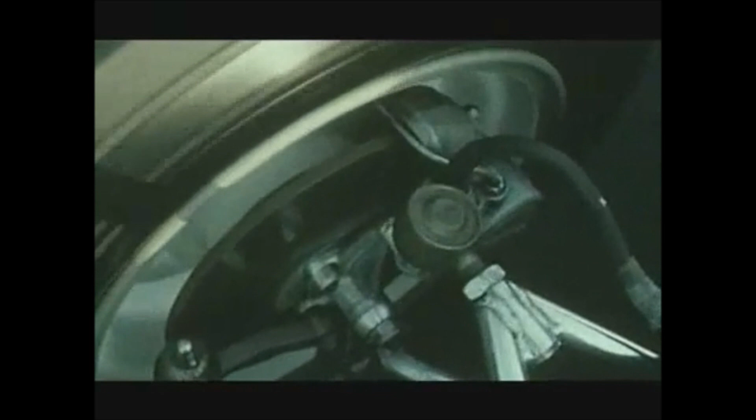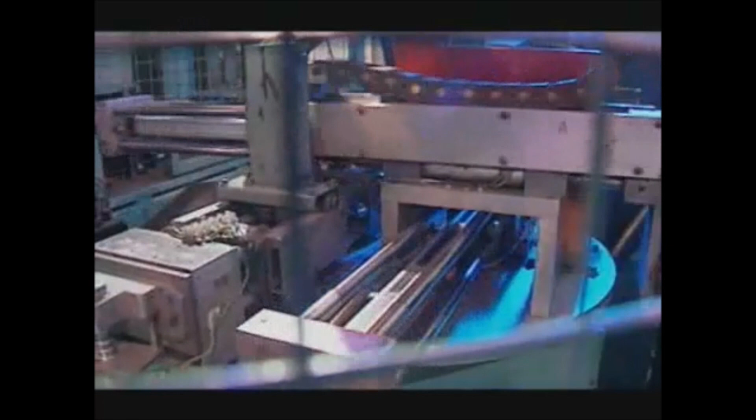As the new car industry started to flourish, he then took up the challenge of developing new materials for brake linings needed by the ever-popular motor vehicle. And it wasn't long before his brand and range of products soon came to epitomize quality and excellence in braking performance. But Herbert Frood wasn't content with making products solely for the car industry, and was soon exploring the potential of all forms of powered land travel. And over 100 years later, Ferodo manufacture brake pads and linings for cars, trucks, bikes and trains worldwide.

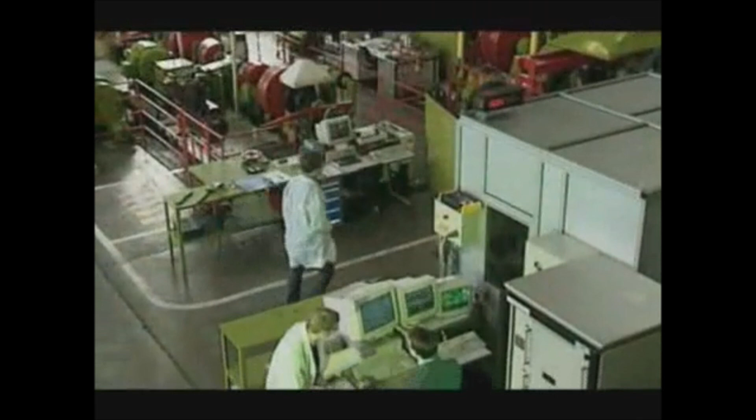In 1998, Ferodo became part of the American automotive giant, the Federal-Mogul Corporation, specializing in the design, production and supply of original equipment to car and motorcycle manufacturers and the aftermarket sector. This led to an important restructuring of Ferodo's motorcycle division and the creation of a specialized center in Mondovi, dealing with everything from concept, research and manufacture through to global distribution.

Here we are in Mondovi, Federal-Mogul's Center of Excellence for motorcycle products. Our world-leading research and development team work closely with major manufacturers to develop not only groundbreaking friction materials for original equipment, but also to carry this technology and highest quality control forward into our aftermarket program.

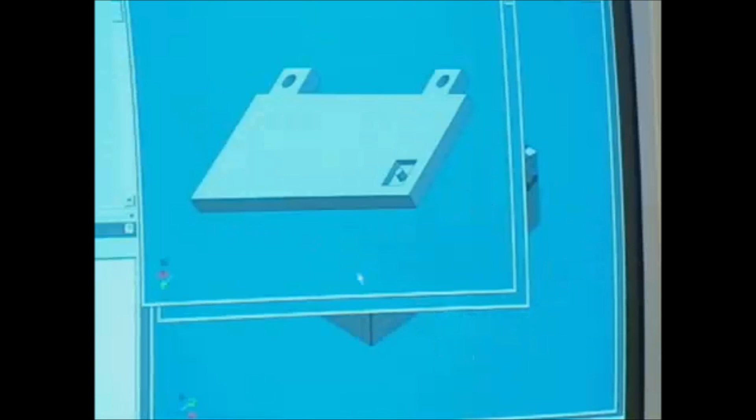The first step in the creation of any brake pad is design. Following extensive consultation with the motorcycle manufacturer and having developed a pad specification, our highly skilled design team sets to the task of creating the desired product. Their knowledge of product application, braking compounds, mix formulae and engineering techniques is invaluable to meeting the challenge, and often exceeding the manufacturer's expectations. All dimensions and characteristics are meticulously checked before the prototype pads are made and sent for intensive testing.

This is one of the largest dynamometers in Europe. It has the ability to simulate the brake system of a high-speed train fully laden with passengers. Its awesome capabilities are one example of the tools we have in this R&D centre. To tell us more, here is the director of the R&D centre, Adelphio Zanar.

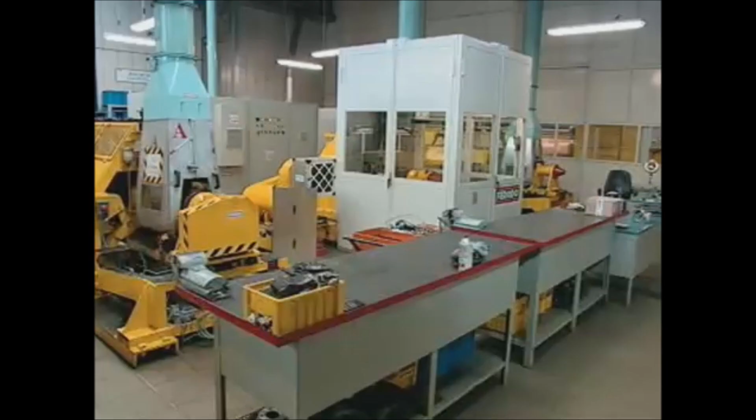In this research and test center, we take a brake pad from a concept to a proven product. We can simulate any test on any vehicle, from a train to a mountain bike. Ferodo has been at the leading edge of friction technology for more than a century. Before any new or innovative Ferodo product goes into service, it is tested and tested again to achieve the criteria set by original equipment manufacturers.

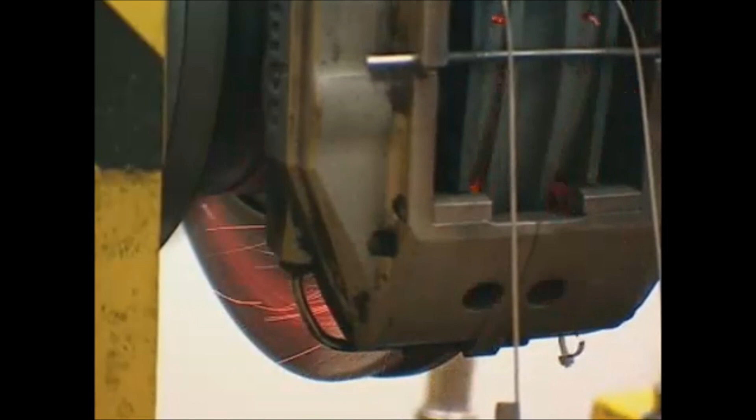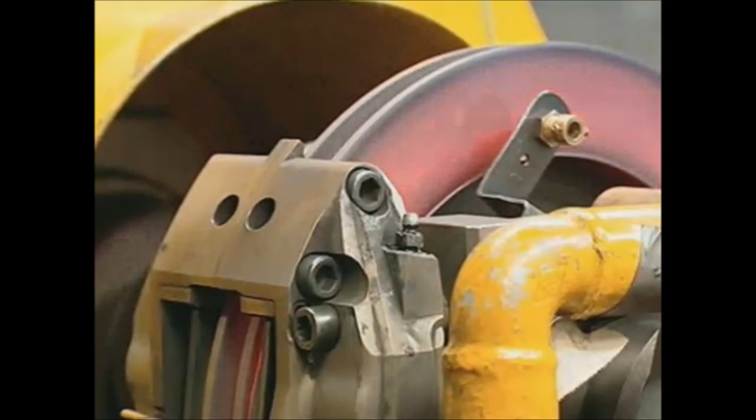Consistent reliability demands stringent testing. Even a product designed for use on a street bike will be subjected to a racetrack simulation to ensure it performs perfectly under the most extreme conditions. Computer-controlled dynamometer programs simulate test schedules. These are often provided by the motorcycle manufacturer to guarantee the material works effectively for the exact application.

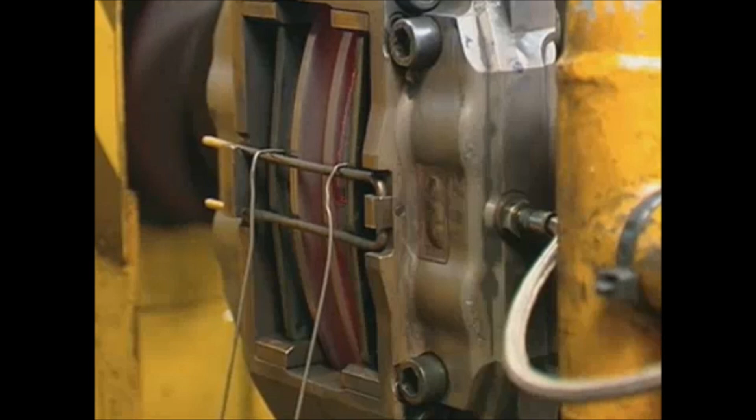Sensors monitor pad temperature, vibration, wear, and many other parameters. Any modifications can then be highlighted, addressed, and rectified before retesting. Only when test results prove that every detail of the manufacturer's specification has been met or exceeded can production begin.

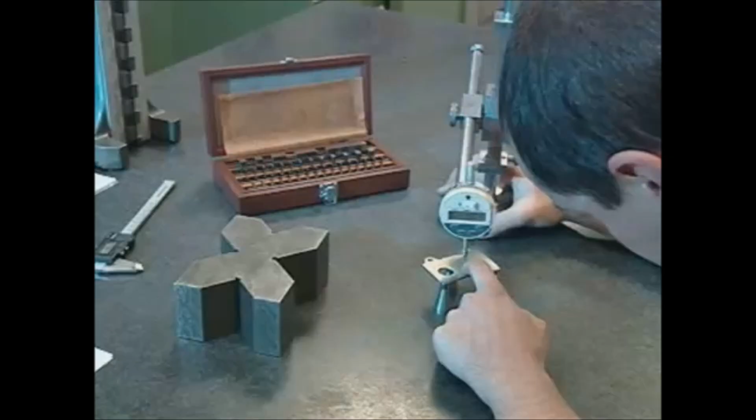This is our state-of-the-art production line, where we're going to take a look at our two types of brake pad technology manufacturing, organic and sintered. To conform with the high specification demanded by the world's major motorcycle manufacturers, quality checks are made on all incoming materials to ISO 9001 accreditation. The Kanban system is used to record and reorder materials from suppliers, ensuring that all batches are instantly traceable. This information is made available to brake system manufacturers to provide proof of our maintained high-quality production.

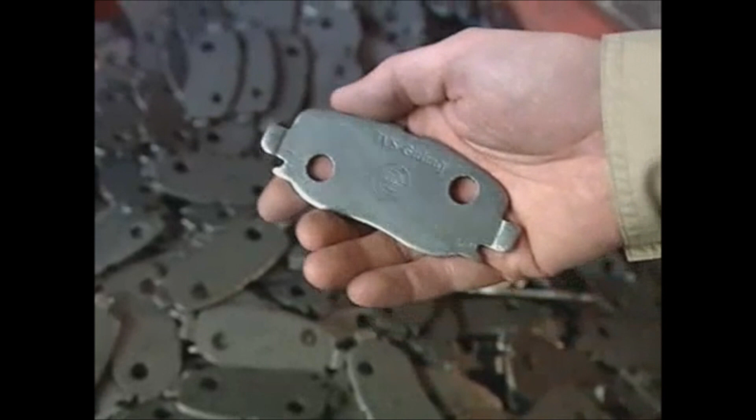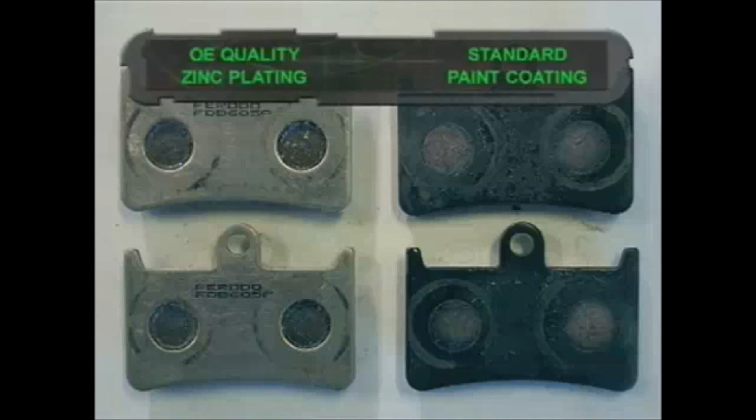Our organic production employs a process using patented zinc alloy coated plates, unlike other aftermarket products which use a painted backplate. The zinc alloy stops corrosion of the backplate in the caliper, preventing it adhering to the piston, a problem common to paint-coated plates.

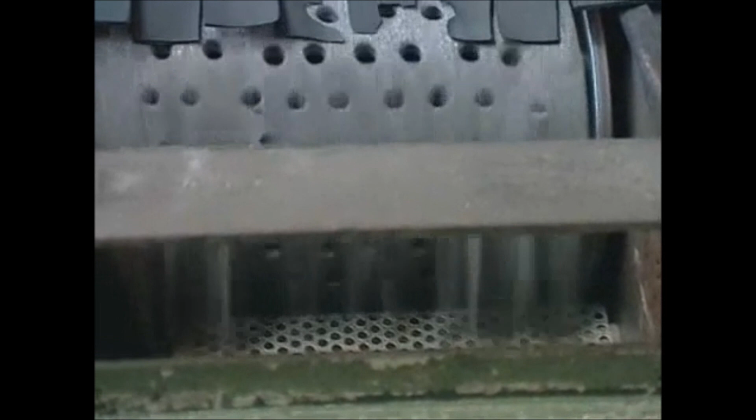The backplates are first passed through a machine where they're shot blasted on one side with cast iron grit. This removes any grease or dirt accumulated during the production process, leaving one side completely clean for the spray application of the Ferodo patented special adhesive. All plates are batch tested to check for the correct surface coarseness and quantity of adhesive coverage.

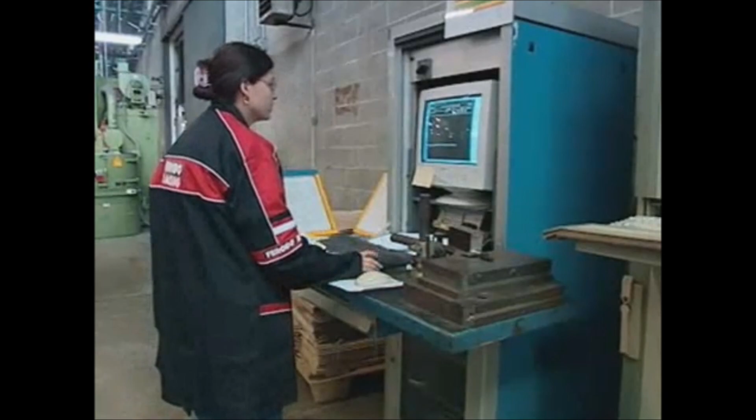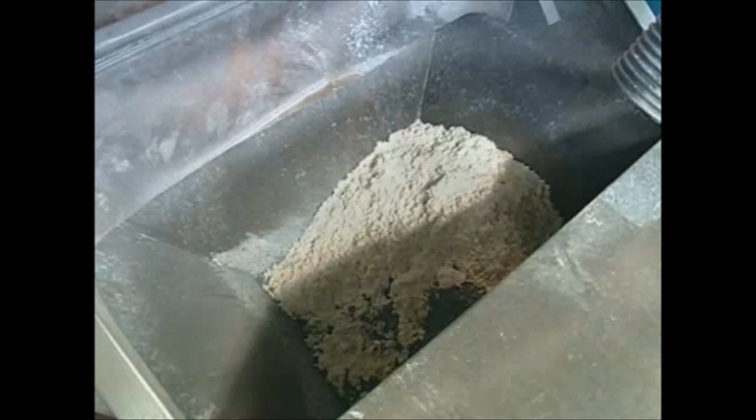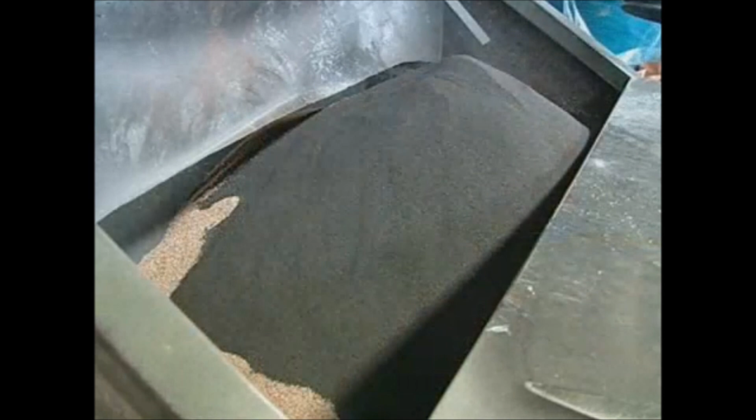At the same time, the mix formula for this product is downloaded into the latest computer-controlled batch mixing plant. The dry ingredients are added to the hopper and individually weighed to an accuracy of plus or minus 0.5% of the pre-programmed setting. Any mix formula typically consists of 50 or more ingredients for optimum performance. The recipe is then transported pneumatically from the weigher to silos before being loaded into the mixer.

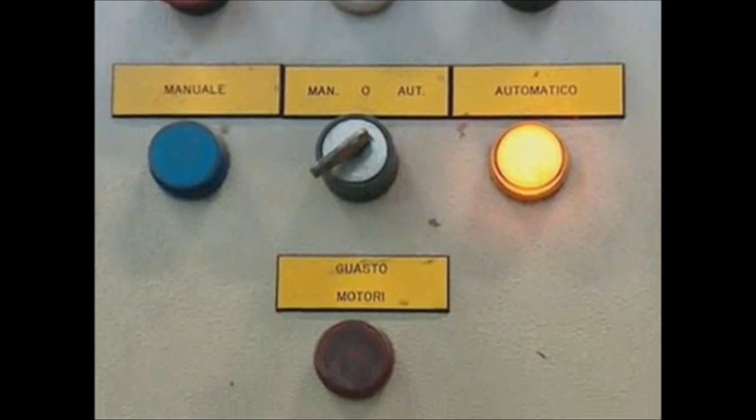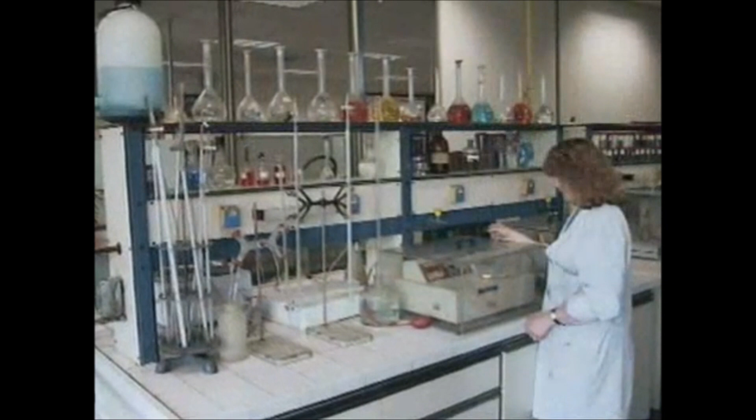It is then thoroughly mixed to guarantee consistency through the batch. All resins and rubber liquids are added automatically. Our dedicated on-site laboratories take samples from every mix, constantly checking density and volatile levels before assigning a quality control approval certificate, required before any mixture can progress into production.

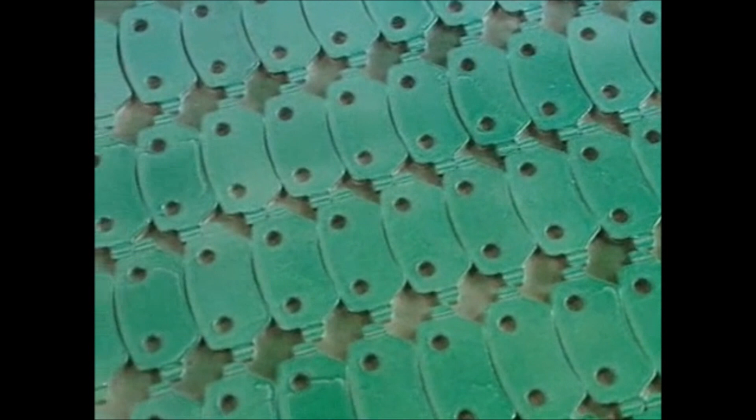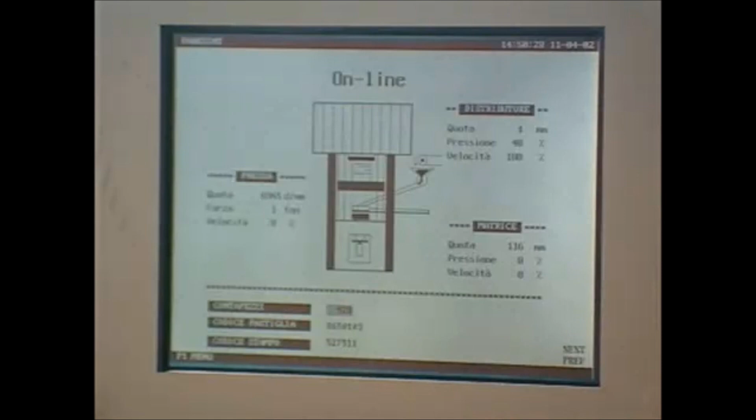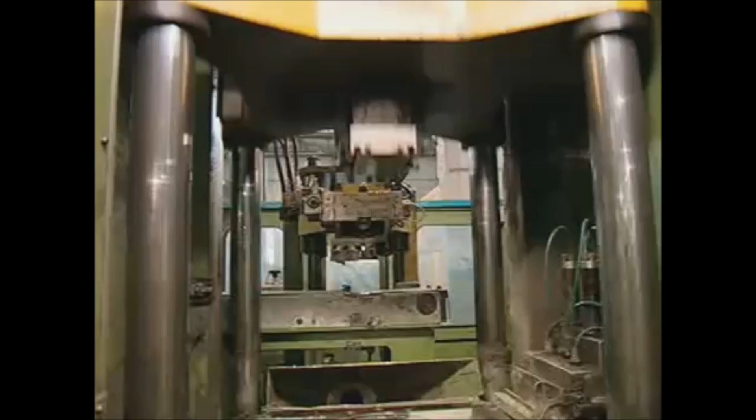The plates and friction material now come together. This is achieved using our patented vulcanization pressing system, a process validated as OE standard and is almost fully automated. After loading the spray-glued backplates onto the press feed conveyor, they proceed to the pressing head. They are held by the press head and driven downwards onto the dies. These are filled with the correct quantity of mixed formula and pressed at high pressure, making a firm bonding to the backplate.

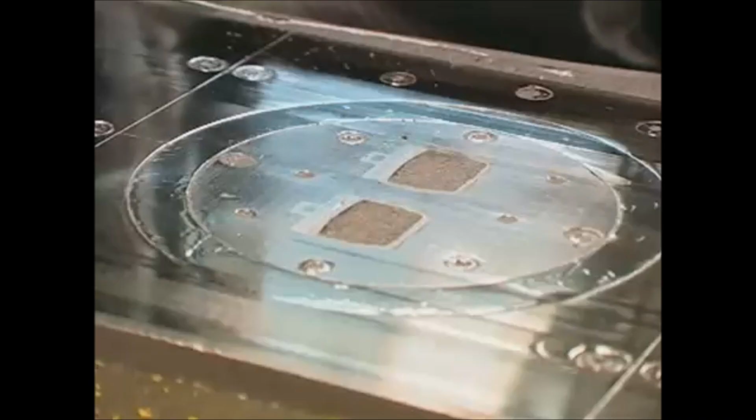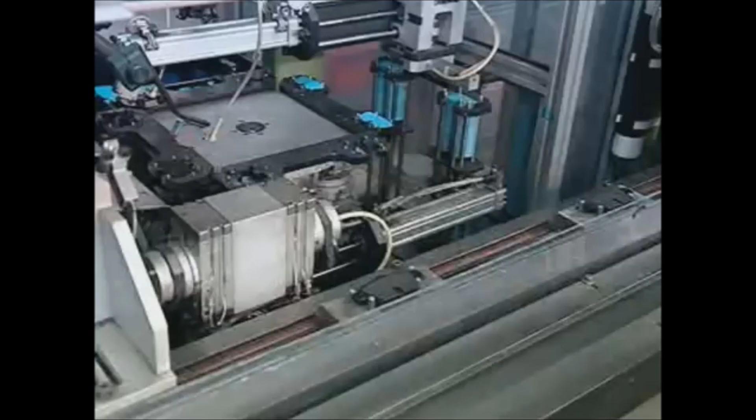The head retracts and the formed brake pads advance to the exit conveyor. The die is then cleaned in preparation for the next pressing. The pads are then cured in a high-temperature oven. Up to this point, all pads have followed the exact same process. It is only now the products are separated for marking either as original equipment or aftermarket. Both are marked with a batch number for trackability and then packed accordingly. This flexible production process allows for a very short lead time of only 31 minutes for the manufacture of any pad.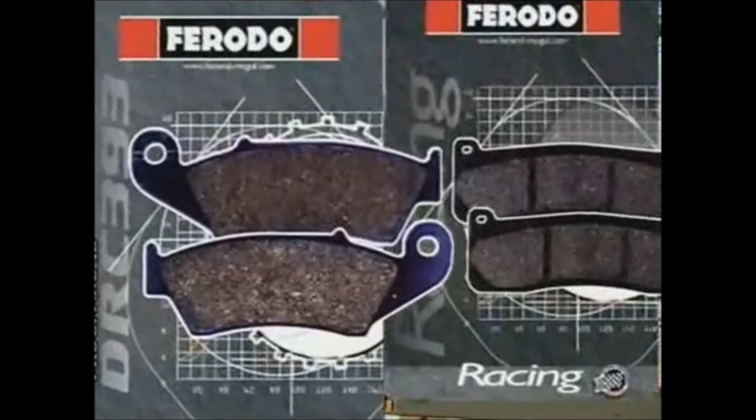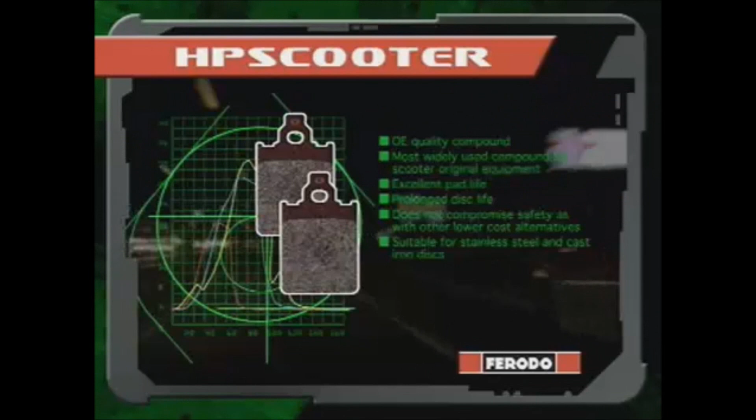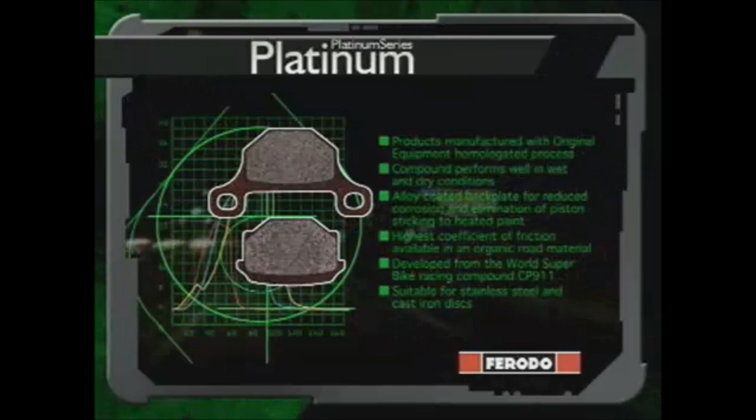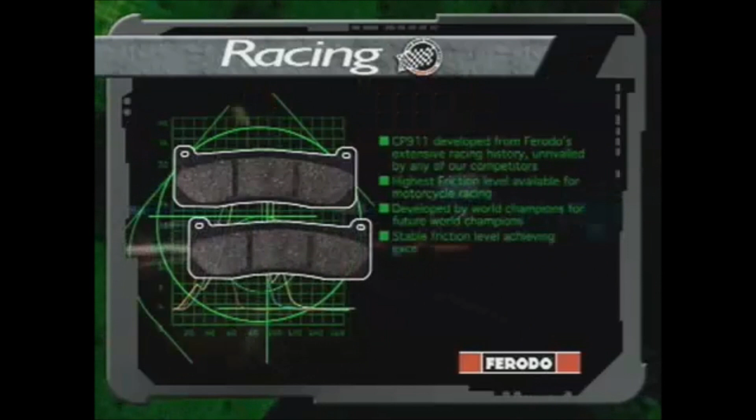Products in the organic offering range from HP Scooter, designed as OE for today's high-performance scooters where safety is the priority. Platinum, the #1 performing compound for high-performance road use, incorporating technology gained from Ferodo's World Racing Program. DRC 393. DRC, or Dirt Racing Compound, offers benefits perfectly suited for competitive off-road use by professionals, ideal for dry or desert conditions. CP 911, the world champion. From the demands of the Isle of Man TT to the circuits of World Superbike, our organic racing pad has provided the performance and modulation required by the world's best riders.

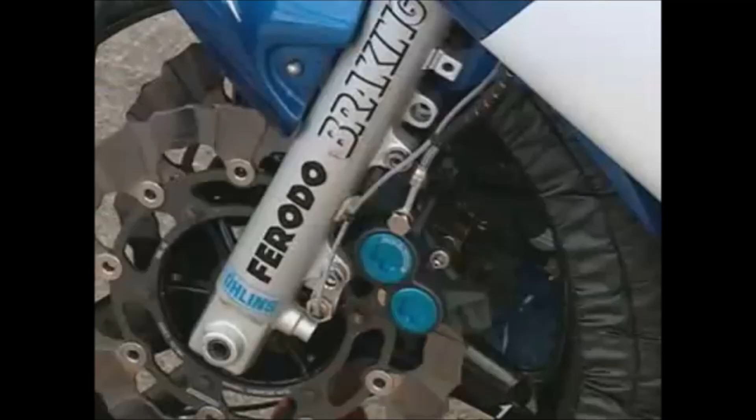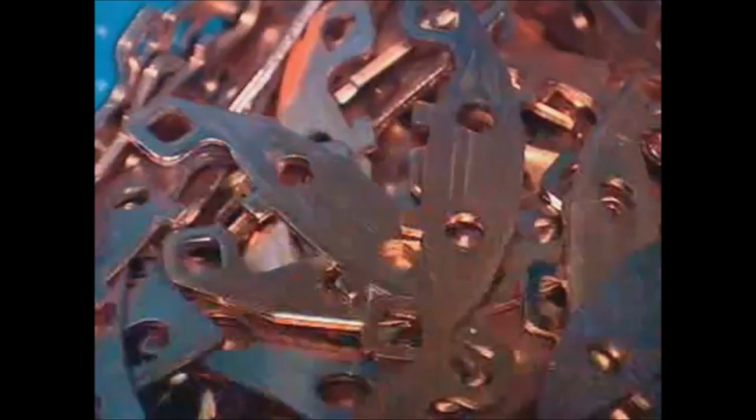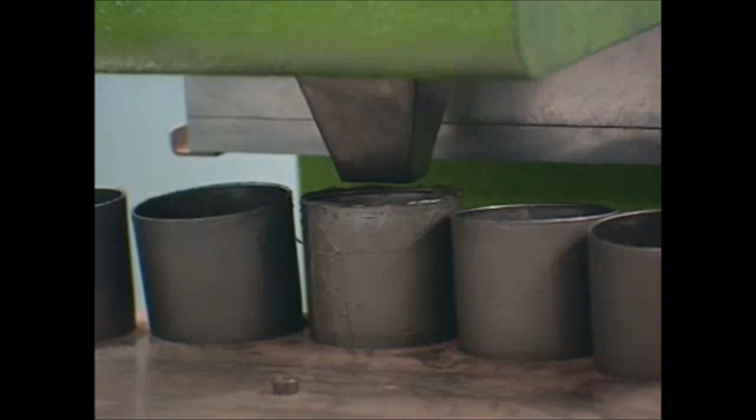Sintered pad manufacture. Our unique process adopts the same rigorous materials quality and production checking as our organic range. But unlike the organic products, the varied backplates are coated with copper, which will bond with the all-metal mixture. The compound consists of metal powders, abrasives and lubricants, automatically mixed until homogeneous. It is batch checked for any signs of loose density before being dispensed into containers at plus or minus 0.5% of the predefined weight. The dies are then prepared with the copper backplates positioned at the base. The mix is then dosed into the cavities.

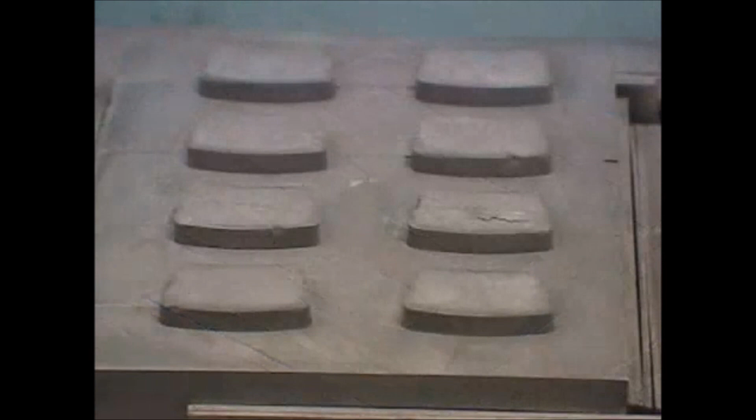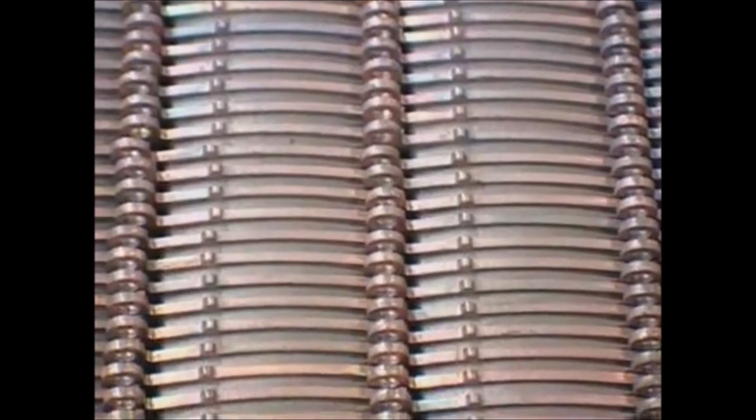Prepared dies travel to the oven where sintering takes place. This process involves the die being pressed at high temperature in a vacuum with inert gas, causing a diffusion of metals between the copper of the backplate and the powders in the friction material. Dies are then allowed to cool before the finishing process, which involves slotting and grinding to the desired pad depth. Pads are then stenciled with a batch number and the OE quality mark.

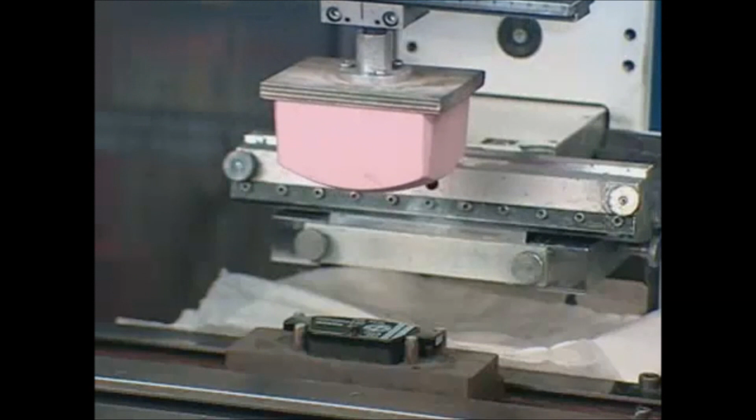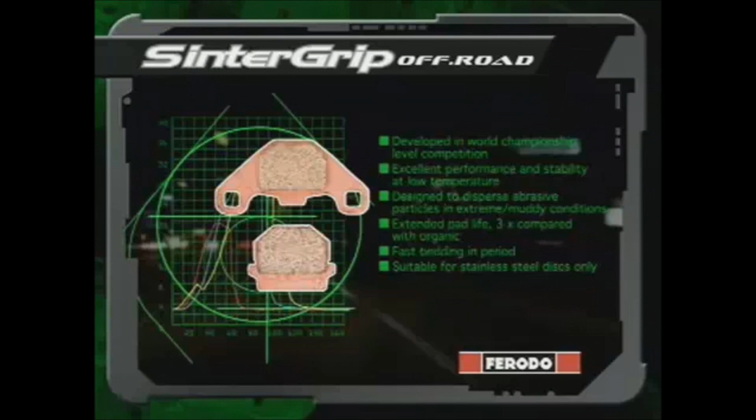Products in the sintered range are Sinter Grip Road, the world leader in sinter technology. This road compound is for the rider who requires the best that money can buy. Sinter Grip Off-Road, the new world leader for ultimate off-road performance. This full metal compound gives maximum response in both wet and dry conditions.

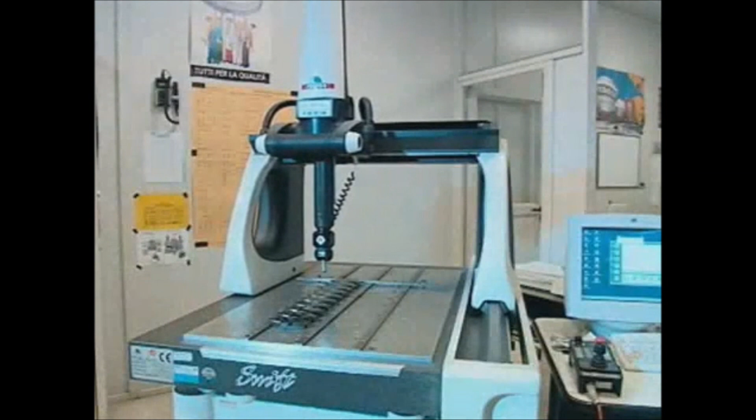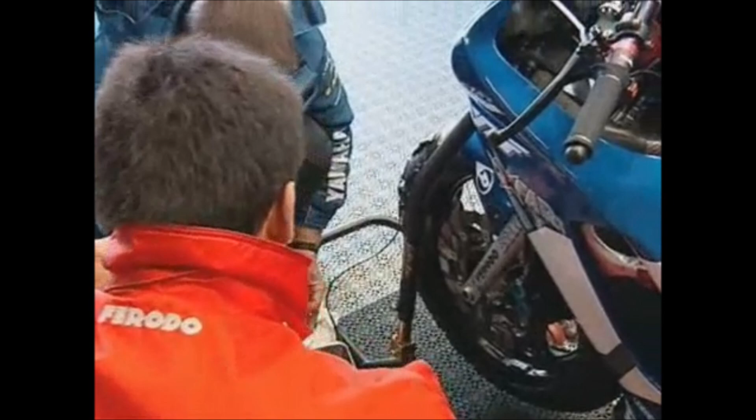All organic and sintered products undergo final OE inspection checks, an extensive examination covering dimensions, shear strength, Krauss testing, and pad hardness. Consistent quality products produced to the same exacting standards as demanded for original equipment and fitted by the world's leading vehicle manufacturers. Ferodo's market-leading quality products and cutting-edge technology would not be possible without knowledge gained by working at the pinnacle of performance in motorcycle racing. World Superbike.

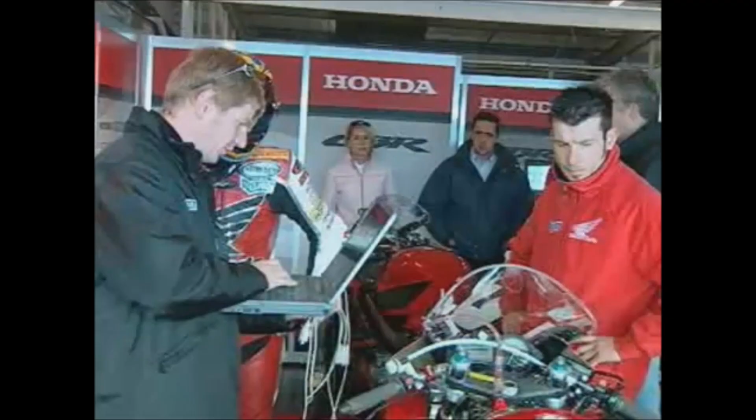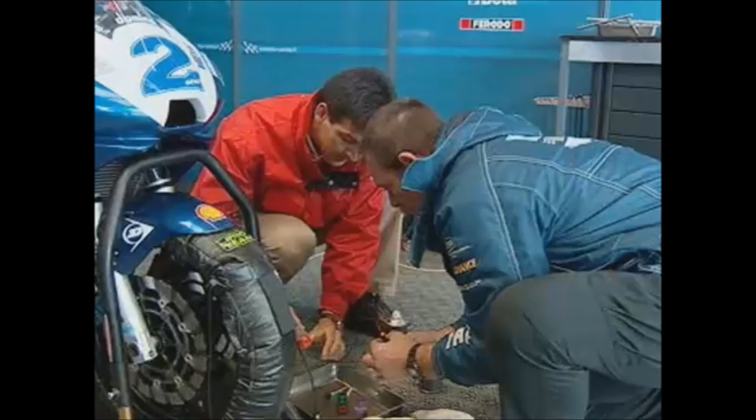Welcome to Silverstone, the UK round of the World Superbike and World Supersport Championship. Ferodo Racing is one of the main sponsors of World Superbike. We're also a technical sponsor, providing on-track engineers who work with the leading teams to develop products that give them the advantage on the racetrack. Working closely with these teams allows Ferodo to gather vital race data from onboard computers as bikes are tested during practice sessions. This live telemetry is fed from many sensors on the bikes out on the circuit to our computers back in the garages. Alternatively, this information can be downloaded after the test run.

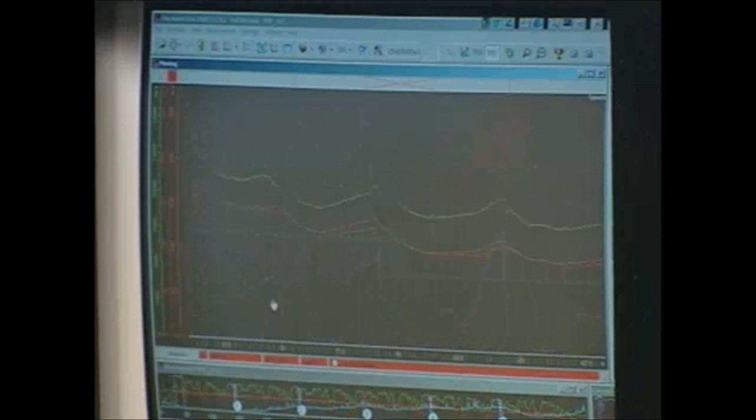This information is collated and analysed by the engineers, enabling them to assess exactly how well the braking systems and individual parts are performing at every stage of the circuit. Information can then be fed back to the teams so systems can be optimised to maximum advantage. Ferodo and Honda have worked together for very many years now, even back into the days when I was a rider. And currently today we're still working very closely with Ferodo on the development of pads and equipment to take us one day to a World Championship, also in the very near future.

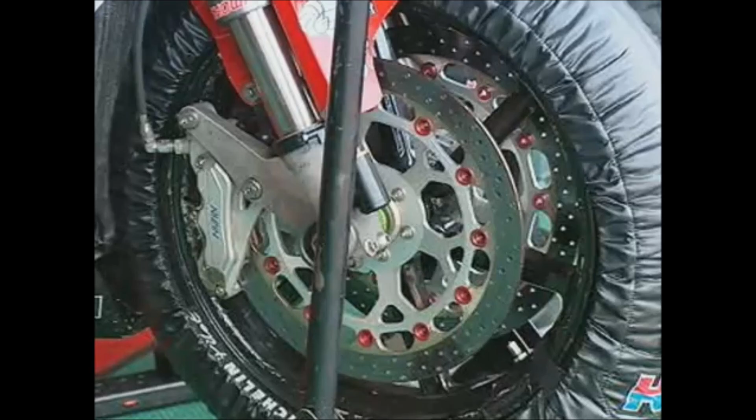Specially designed brake pads and large braking systems are used in both Superbike and Grand Prix racing. However, in the domain of World Supersport, the machines are restricted to the braking system as supplied for the street bike. The demands made on these systems by the world-class riders are tremendous, and it's the all-important data collected by Ferodo at race circuits that means we can develop the ultimate in friction materials for the World Supersport bikes.

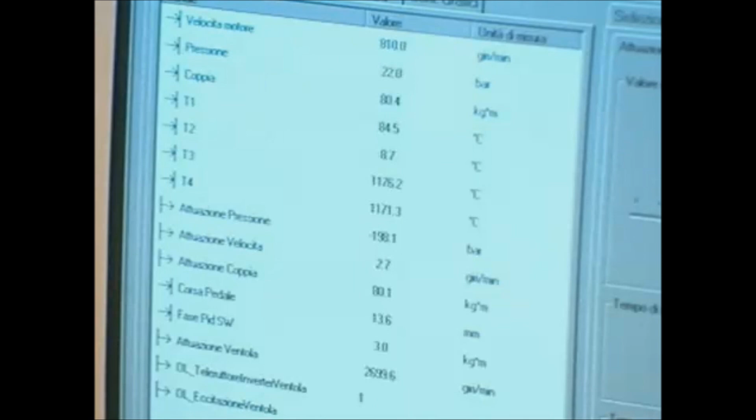Data from races is also investigated further by the research and development team back at Mondovi. It is fed into the dynamometer computers, enabling an exact simulation of lap runs under laboratory conditions, giving deeper analysis of the product. The knowledge gained from this research naturally finds its way into the complete range of products offered by Ferodo. A range of products second to none for original equipment and aftermarket.

A world-beating brand with over 100 years' experience from a global corporation and in partnership with leading motorcycle manufacturers. This is the pedigree that has led to Ferodo's justifiable position as the first name in brakes.